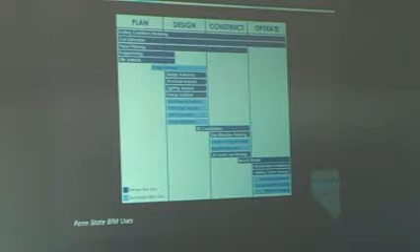This particular slide came from Penn State University, and this talks about all the different BIM uses that would occur during the project. So one of the things, as you start to talk about BIM, you look at is the building life cycle. You look at the expense related to operating that building, not just the planning, design, and construction phase. So you can see here about 15 different uses, what they call primary uses for building information modeling. Those of you that have started into BIM are familiar with a couple of these at least. 3D coordination, for example, is one of the low-hanging fruit that I think many people have been exposed to so far. It was driven by general contractors, mechanical contractors. Depends on what kind of project, but let's say hospitals was a great place to start.

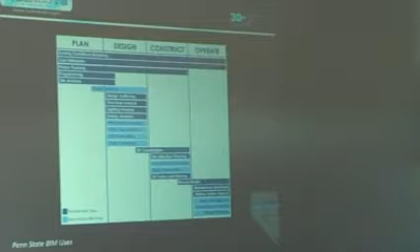3D coordination is how can I put every bit of three-dimensional information together in a model, have that holistic model, and then start to look for clashes. And if I can find those clashes virtually, then what kind of payback can I get for the owner, for the design and construction team? We can look at reducing RFIs, we can look at reducing change orders, and other constructability issues. Other things here that you'll see are different types of analysis that can be performed by different design professionals.

My pleasure to get in front of such a large group at a facility like this to talk about something that I'm very passionate about. And we'll see through a little bit of my history how this has all come to be.

But first, a quote from a rather renowned individual: never interrupt your enemy when he's making a mistake. And not too long after I saw this quote, I saw the following quote: that way it will become a bigger change order. Right?

I took off the name of the individual, but you can imagine that there are some market segments for sure that do benefit from mistakes that people make on their plans. Not the least of which perhaps are lawyers, right? But there's lots of other people that ultimately benefit from this. So let's keep that in mind as a foundation for what we're about to discuss.

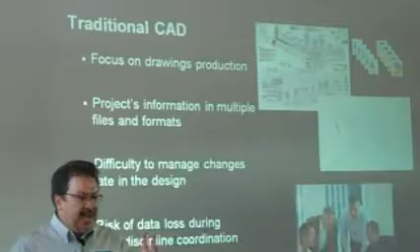Okay, so touching briefly then on traditional CAD. The history of CAD, whether it was spelled C-A-D or C-A-D-D, often referred to as computer-aided drafting, computer-aided design, or the double D, computer-aided design and drafting, was really not so much that, but the concept of computer-aided documentation. It was the attempt to recreate on the computer what we did via hand drafting.

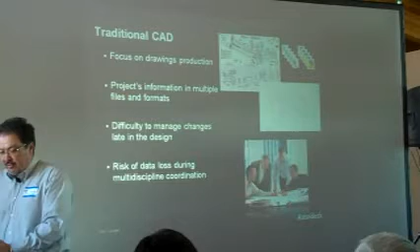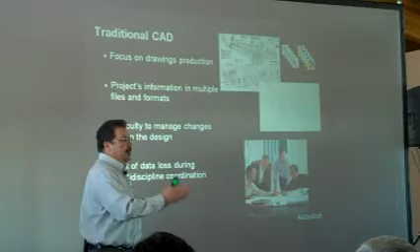And often the way that came to pass is that the project's information was stored in a series of files. So I had a file for sheet 1, a file for sheet 2, and a file for sheet 3. And the problem with that was when we had to make changes, particularly later in the design cycle, then what was required? It was necessary for every person that touched those files to make sure that they properly updated the files per the new design. 100% efficiency and accuracy was required.

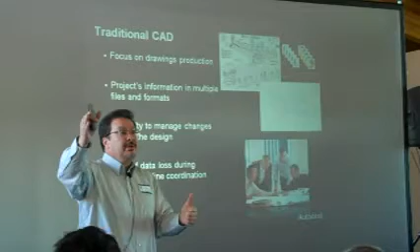Now, being human, of course, that never happens, right? So it's not uncommon that there are some sort of errors and omissions that creep into our document set. And, of course, due to Murphy's Law, which of the drawings is that object in the field going to be built from? The one that has the error on it. It's always the case.

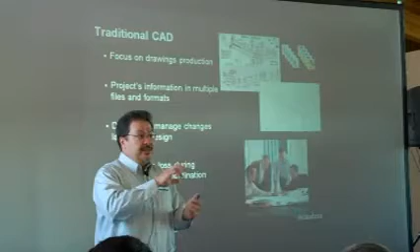And then as my data as a civil engineer had been passed on to other disciplines, they could not immediately consume my data, so what did they have to do? They had to recreate my information in their systems, which again introduced the potential for error in simply inputting my numbers into their system, right? That's always a possibility. So there are some efficiency inhibitors in the traditional CAD environment.

As an example, being a civil engineer, I'll use one of the workflows that I traditionally had: if I had an existing ground surface, one of the things I had to do was to design a road. So I would create and define the alignment. Once I had the alignment, I would sample against the surface and that alignment, so I would sample a ground profile, basically. Then I could create a profile view.

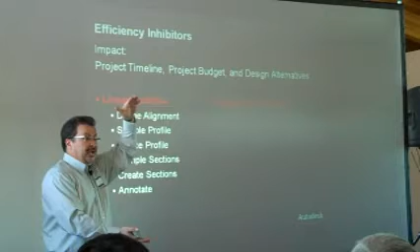At that point, I may wish to sample perpendicular to the alignment and sample sections. And then I could drop in my section views. And then at some point, well down the road, I can create my annotation. Well, that was a finite period of time that it took to complete from step A to step Z.

If I had a design change from whatever source, in the traditional CAD applications, I can't go back and easily edit an alignment in some of the traditional civil engineering tools. So the process was, you would delete it, erase it effectively, and then create a new one. And then what would happen? You would have to step through the process from A to Z over again.

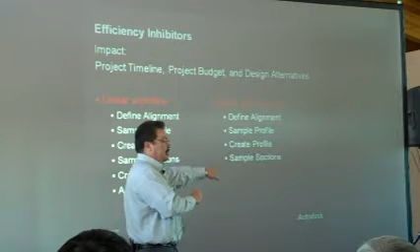And then create your annotation. And every time you had a design iteration, you had to go through all of these steps again. So ultimately, every design iteration, there was a finite period of time, or budget, or a timeline or budget, whatever you wish to call it, there was a finite period for every potential iteration.

So it doesn't take much math to figure out, well, if it takes this much budget or this much time, over the entire course of my project, I only have so many potential design iterations that I can go through before I wear out my budget, right? But that's not going to complete the job for me. So I can only do so many and still accomplish the other tasks that are required to complete my project. Well, that's a challenge ultimately to being, one, sustainable. I can't go through all the potential design iterations I may wish to be sustainable and get this design appropriate.

Now, additional challenges to business. Litigation, I mentioned litigation a bit ago, and as it turns out, and Joe alluded to this a bit ago, communication: a full 25% of all litigation in the civil engineering community was caused by poor communication. So I might have done something, I didn't convey that properly to someone else that it's critical in the design phase for this project. But then errors and omissions, almost another quarter as well. So between those two items, almost 50% of all litigation is caused by just those two simple items.

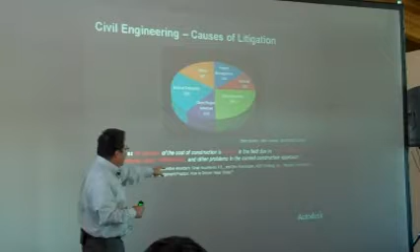Now there's a couple of other stats I'd like to point out. Again, I apologize for the small print. For those of you in the back, I'll go ahead and read this. It says as much as 30% of the cost of construction is wasted in the field due to coordination errors, waste of material, labor inefficiencies, and other problems. So here I have the quote. This was from a couple of gentlemen presenting to the CMAA, Construction Management Association of America.

And then separately, the Economist magazine a couple of years ago pointed out that inefficiencies, mistakes, and delays account for $200 billion of the $650 billion spent on construction in America every year. If we do the math, that's 30%. So that more or less jives with the typical, what percentage of a contract goes into contingency fees? Right? 25–30% is not an uncommon number. Right? People are trained to expect inefficiencies, errors, and problems. And that's a reality in every contract that exists.

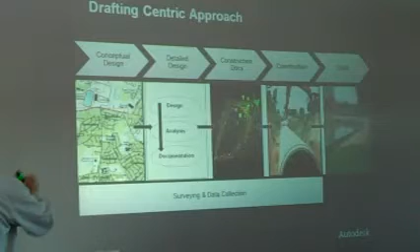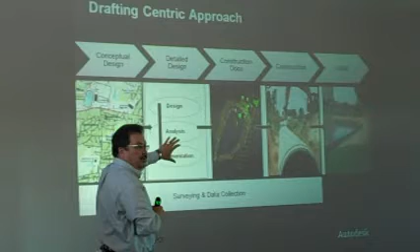So as people address this, we talk about this concept of a drafting-centric approach, which is often a very linear process. We understand the linearness of conceptual design, going to detailed design, going to construction documents, etc. But even within them, if I just focus on the detailed design, I have to do that design. Then I have to do the analysis. And then when I'm comfortable with that, I would more than likely then approach creating my documentation. And not until that stage, because again, a lot of that work could potentially be wasted.

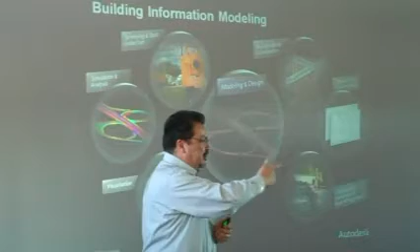So BIM, Building Information Modeling, is one of the ways that people are using to address all of the challenges in business that they're experiencing. Now, it says building, so how does that apply to civil engineering per se? And a lot of people have chosen other terms, as Joe mentioned, the concept of model-based design. And whatever resonates most with any individual community or company, that's good. But how BIM has been associated with civil engineering, it's not building as in a physical structure, but building as in the verb, the act of building. Right? So anything that will be built and that we can create models that contain information is BIM.

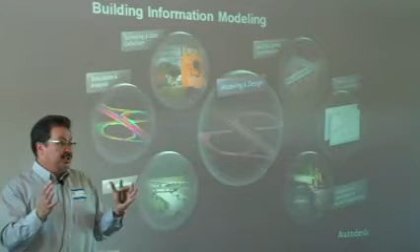So from the civil engineering perspective, right away, even from the surveying and data collection, LiDAR data capture has become such an important aspect going forward. Many people are saying, okay, here's this point cloud. In essence, that's already a model. I can see it, it has physical attributes. I can pull information, distances and dimensions and so forth from that. And take that model, like the cloud, and put it right into my design software. And from that design software, I can begin to do analysis. Right? You can't do that with lines, arcs, circles and text.

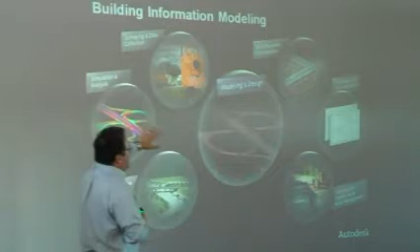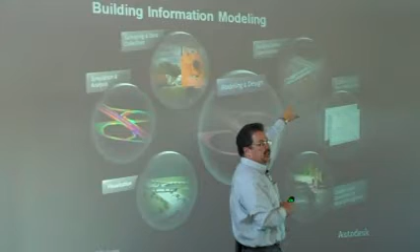And then from that design model, of course I can create my documentation, which is so very important, but I can also create the visualizations. And then I can share that model with other disciplines so that they can use my model in their models to make sure that our models mesh and work together. And then lastly, we can take that model and hand it off to the owners for various reasons, not the least of which is construction. And one of the most commonly used examples of model-based construction in the civil engineering realm is automated machine grading, right?

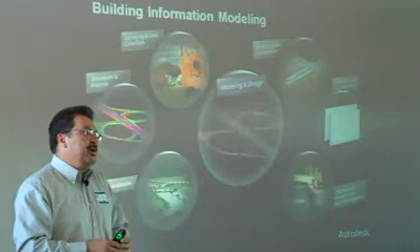GPS-guided machine grading. And I have a little example a little bit later that talks about the benefits of that. So, there was a document referred to as the SmartMarket Report by McGraw-Hill that talked about many of the benefits for the various people that use BIM.

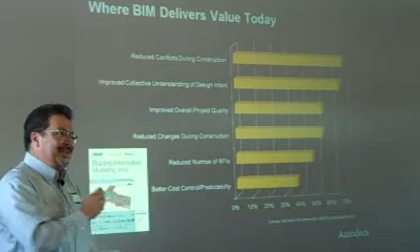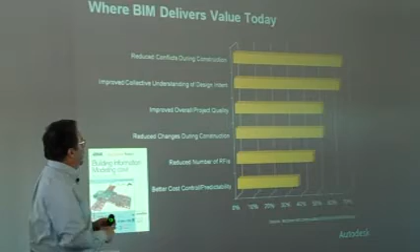And as I reviewed those, one of the difficulties that I saw for the civil engineers was a lot of these benefits were for well after I, as a civil engineer, was involved. So, reducing conflicts during construction, yeah, that benefits them, maybe not me so much. Right? And improved collective understanding of the design intent. That might be, again, further down the road. Improved overall project quality, reduce changes during construction, right? Reduce the number of RFIs, better cost control and predictability. Many of the benefits that are being touted are not so immediate to the civil engineer.

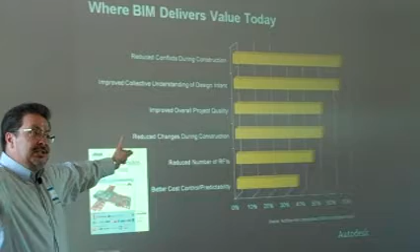But what the civil engineer has ignored, and often people say, well, we're not mandated to use BIM yet, so we're choosing not to go there. But what they're forgetting is that all those people, to gain all these benefits, they need models. And they're going to work with civil engineering companies that are providing models. Right? And if you're not doing that for them, someone else is. It's a simple reality of providing them the most value. Right? So we'll see another instance of that in just a moment.

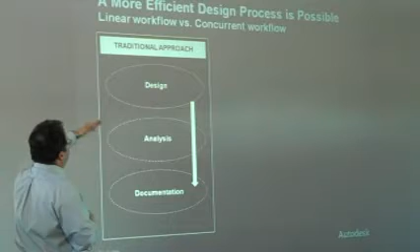Okay, so back to the linear process. Traditional: we design, we analyze, we document. Well, now, in a model-based approach, or BIM approach, things happen simultaneously. And people begin to wonder, well, how is that possible? How can all of these three things be happening simultaneously? Well, I have a couple of examples. One, basically, the newest design tools use what's referred to as the dynamic object model.

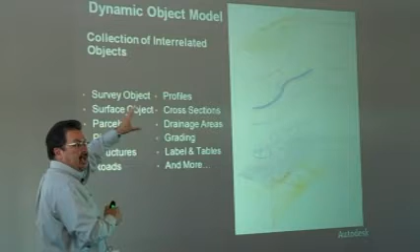And within these tools, there are physical objects that represent intelligence. So we have a physical object referred to as an alignment. That would be this here. Physical objects that are parcels or surfaces. The survey object, the road, the pipe network, etc. These are physical things that understand what they are and how they're supposed to behave. So, as a brief example then here, I have a small video that talks about object modeling and how this all comes to be.

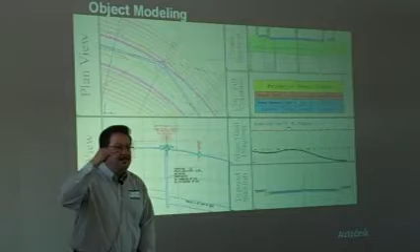Okay, so for those of you that are in front, you're going to be able to most tell this, and you can convey for those in the back what's happening. So from a simple design change of moving the profile, notice the structure is here. Right? But when that profile is moved, that structure is intelligent and says, my rim must be at that surface. So it grows automatically, and it grew over there in the top section as well. Now here, as that's brought back down, if we're looking over there in the top right, that road will drop down. What's going to happen to the structure? It doesn't stick out at the top of the road, it drops back down as well. It understands its relationship to the surface.

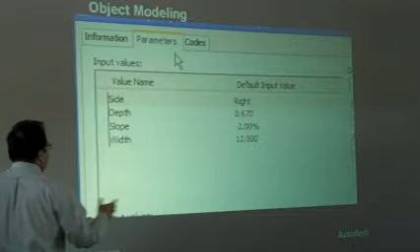If a typical section of the road is modified, and here we're going to widen a 12-foot wide road to 18 feet, if we're looking at some of the different components, what we'll see will happen, as previously happened in that other example as well, in this case, the road is going to widen there. Right? We didn't see it, but the quantities would have updated. The mass haul diagram would have updated, all as a part of the same process.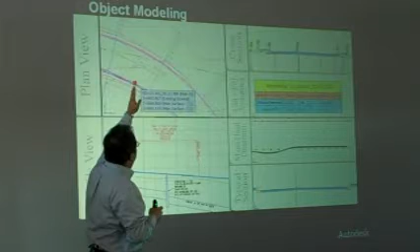As we take that manhole structure and move it from one section to the other, we're looking at the section over there, what's going to happen? It updates to the other side of the road. As we move that manhole structure off of that 2200 station there, what's left at 2200? Just the pipe and not the structure itself.

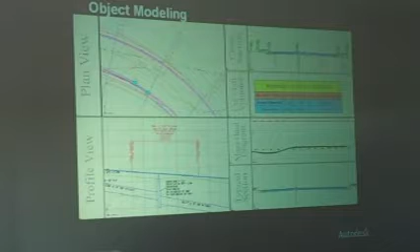Right? So the fact that as I'm working, as I'm designing, everything else is dynamically updating in the background. It lowers potential errors and omissions. It gives me significantly more design iterations than I would have had in traditional methods, where I would have had to repeat all of the steps just to get to the same point where I already was. That's the significance. And that's what allows that simultaneous design, documentation, and I forgot my third one. Analysis. Thank you very much.

Okay, so to continue. There's plenty of organizations now, and some of the earlier slides had some of these names on here. I wanted to point out a couple because they have impact as to what I'm doing. Certainly the General Services Administration, the biggest real estate owner in the world. They own all of the U.S. embassies. They're responsible for the Pentagon, all of these national facilities. The U.S. Army Corps of Engineers, in control of all the dams.

The states of Wisconsin and Texas have mandated that all work being done on state facilities be done via BIM. Ohio has declared that they're having a BIM mandate forthcoming. And then within the last month, Australia has said that they fully support the concept of BIM. They haven't mandated yet, but they say this is the way forward and it's what's going to help our economy get out of the doldrums that we are currently experiencing.

And then even after that, but perhaps more aggressively, the United Kingdom put out a report that said they are fully 100% behind BIM. They're going to approach it via a staged adoption process with fully mandated BIM by the year 2016 for anything related to government jobs in the UK.

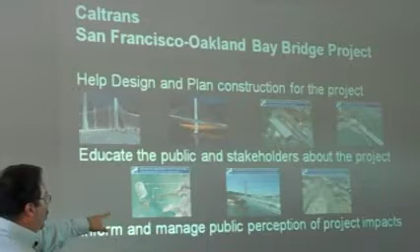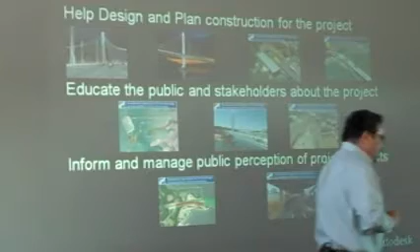And then schedule it. They also used it to educate the public and stakeholders regarding the project. There was plenty of pieces. You can't watch the news in San Francisco without seeing some references to either the Oakland Bay Bridge project or what's referred to as the Doyle Drive or Presidio Parkway projects. And because they have models, they repurpose the models for many different reasons. And they've been able to inform and manage public perception regarding the project impacts. One of them in particular had to do with a detour that's happening for the project.

And they've been able to use those models so well, I should have had this up a moment ago, that they've even created an app. Can you see that? It says the Bay Bridge Explorer. So this app allows people to drive their detour right now. You can download it for free. And it was possible because of the model, right? It was repurposed. But what else is this?

Right down in the corner, it has an engineering company that provided that model. That's PR. This is an Apple app, and people are dying to get Apple apps available. And here is free PR for that organization because they've been able to produce that model for Caltrans.

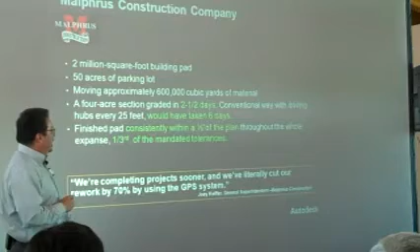So with that, just a couple more points. I mentioned the automated machine grading. Just a couple of facts. This particular organization was able to do a 4-acre section of a larger project in 2.5 days, which would have taken 6 days to complete. They were consistently accurate with automated machine grading to 1/2 inch of plan, and that was 1/3 of the 1.5 inches that was required per their contract.

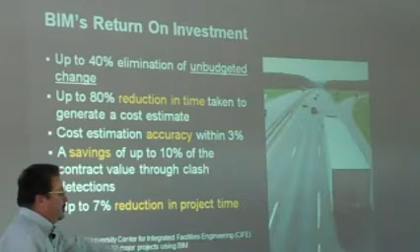So, then BIM's return on investment, the bottom line. This was from a report done by the Stanford University Center for Integrated Facilities Engineering, based on 32 BIM projects: 40% elimination of unbudgeted change, 80% reduction in time taken to generate cost estimates, accuracy of cost estimation within 3%, and it goes on and on. Ultimately, the bottom line, a reduction of 7% in project time for most people that were involved in these projects.

And in conclusion then, how do people win with BIM? What do they gain ultimately out of this? It boosts productivity, more design iterations, correct?

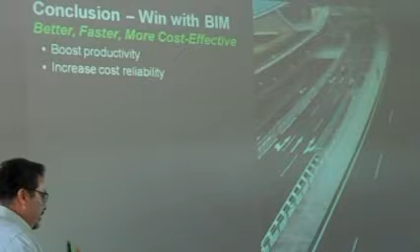It increases cost reliability, less clashes found in the field, that the model has all the components, and that allows us to cost those up quicker. Build more sustainably with more design iterations, visually explore constructability. I can sequence that model, better predict and communicate project outcomes, downstream value to that data, and it ultimately does build closer business relationships amongst that community that has already been capable. Who are they working with? Only each other, because everyone else is not quite there yet.

So for a business, ultimately it's less errors and omissions. As a matter of fact, the first time I had this on the slide, one of these words was misspelled, because it happens. Errors happen, right? And this has the tendency to reduce those, and less financial risk, and ultimately less financial exposure. So changing the way we do business is essential to remaining competitive at the current stage that we're all working in. And that concludes my section.

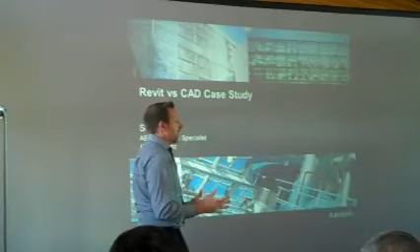First, a little bit about me, Scott Davis. I'm an architect out of Southern California. Angel and I have been with Autodesk about the same amount of time, just over 4 years now. I'm known in the community as the Revit guy, because I learned about Revit the day it became available to the public way back when. It's actually been 11 years now, prior to Autodesk even owning Revit. I introduced it to my firm in Southern California. I worked for a firm called WLC Architects for about 8 years, and then left to join Autodesk because, like Angel, I'm very passionate about this particular technology.

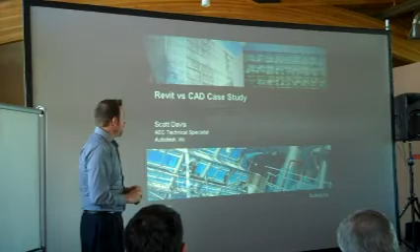With this particular audience, what we want to talk to you guys about all day long is the business value of BIM. So I was looking for examples of this, and I found one online. It's pretty recent, and it's a case study. So let me jump over here.

I didn't get a chance to get Angel's little clicker plugged in. There's one right there. Which one? To the right. This one? Yeah. Does it have a key? Alright, there we go.

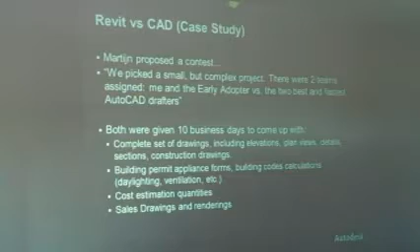This actually came from a website called the Revit Forum. Oops, I can't get to it right now. And I have a link at the end of it. But Martijn is actually out of the Netherlands and has his firm and was really perplexed with how to get his firm to move over to BIM. They were a CAD-based workflow. They were using AutoCAD, and he was having struggles trying to convince the upper management why BIM and Revit in this case made sense. So this is from his website, from this blog post that he wrote.

They proposed a contest internally. They picked a small but complex project. There were 2 teams assigned. It was Martijn and his early adopter in their firm, who was a Revit user, and their 2 best AutoCAD users. Their fastest, best AutoCAD users. They were both given 10 business days to come up with a complete set of drawings, elevations, plan views, details, sections, construction documentation, building permit compliance forms, building code calculations, daylighting, ventilation, etc., cost estimates and quantities, sales drawings, and renderings as well.

Along the way, they wanted to propose some design changes, but they didn't really want to tell the team too much about this, so they said after 8 days, structural calculations would be supplied, darn structural engineers, that would force some design changes to take place. After 3 days and 9 days, there would be a mandatory, but so far undisclosed, set of changes by the principal architect. So they're introducing some change in this. And Angel also mentioned the real power of BIM is not only the documentation in the first place, but the change management that happens. After 10 days, each team would grade each other's team's drawings.

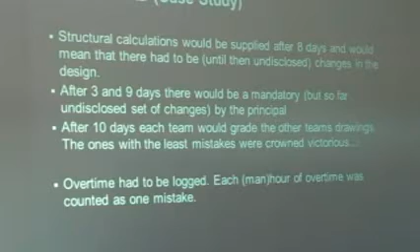The ones with the least mistakes were crowned victorious. Overtime had to be logged. Each man-hour of overtime was counted as 1 mistake. So they basically counted mistakes, and they counted the hours of overtime on the project, and those were points. The Revit team won by 64 points to 3. The 3 points came from the fact that they had 3 hours of overtime, which was for a very long Revit rendering. So somebody had to stay in the office and tend to the rendering. And probably the most compelling part of this is that the other team didn't even finish the second set of changes in CAD by the principal, nor the renderings, and I find this pretty funny, because they didn't have time to build the SketchUp model. Right?

So they were building everything in CAD in 2D, and they were trying to run a parallel process, which was to build a SketchUp model to actually have the visualization and do the 3D at the same time. So that particular team is now fully converted over to BIM, basically convinced the principals in this particular firm of the business value of BIM. It was just huge, compelling reasons why they made that switch.

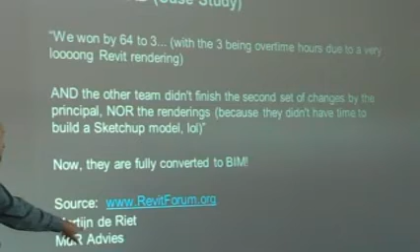Here's a source. It's actually on the RevitForum.org if you want to go out and look for it. If you look for Martijn de Riet with MdR Advies in the Netherlands, you can find that post on there and read up a little bit more about it.

So what I want to do next is actually jump into Revit, show you a little bit live, for those that aren't familiar with it, and how it works, and just some of the simple things that it does for enabling us to manage the change within our drawings themselves. Switch over, oops, my resolution changed dramatically. Zoom to fit.

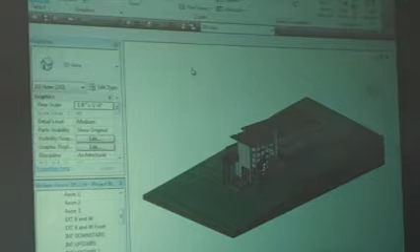So first of all, in a Revit-based model, obviously we're doing things mostly in 3D. As we start to construct a particular project, everything we're placing, rather than a CAD-based workflow, drawing lines, arcs, and circles to represent objects, we're actually placing the real objects, or representations of those objects. So I place walls, I place doors, I place windows, and those objects all have intelligence.

So the lowest hanging fruit of a BIM-based workflow is, of course, visualization, being able to show our clients models like these, and not only showing them from a 3D exterior view, but even getting inside of it. So we can get inside of a model, we can zoom this one to fit, and we can use tools, much like video games, to stand in a particular space and look around or even walk around, and much like the video games, minus the machine gun, we get to visualize the interiors and exteriors of our models.

Much different than the old school way of going into a client's office with a set of plans that might look something like that and trying to explain to them what the project is going to look like. So we're doing everything in 3D. Now, a couple things that I want to point out to you as far as change management in a way that Revit differs from a CAD-based workflow. And Angel hit upon this.

In a CAD-based workflow, everything's done in separate drawing files. So like you mentioned, you have a drawing set for sheet 1, another drawing set for sheet 2, you've got DWGs for plans, other DWGs for sections, elevations, etc. And you have to X-reference all of that stuff together. And if you make a change anywhere in the set of documentation, it's our responsibility as humans to go back through and pick up all of those changes, right? Tremendous amount of time consumption there.

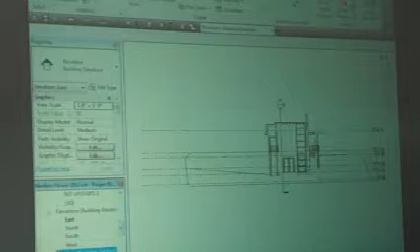Revit is a database-driven software system. Everything's included inside of one single file. So as we're looking at this 3D model, our plans, our sections, our 3D views, our elevations themselves, any renderings that we have, and even our sheets are all included inside of one single file. So anywhere I make a change, it ripples through the entire data set for me and updates all of that file.

So for instance, if I go into one of our overall floor plans here and I start looking at this particular building section, I'm actually going to hit delete on the keyboard and get rid of that building section. If you look at my project browser over here on the left, I have no more building sections left in my project. Now in a CAD-based workflow, if I was a user and went into the directory and deleted all my sections out, somebody would probably kill me, right? Because it's going to take hours to recreate that kind of stuff.

In Revit, since we have a live model, it's literally picking the section tool, picking 2 points through the model, and Revit creates the view for us. It's a live section looking directly through the model. Huge time saver, right?

It always happened to me when I was in practice that these kind of things came up on a Friday afternoon. The principal would come up to me and say, hey, we've got a meeting Monday morning, and I need you to draft a section through that model for me. Oh man, it's going to be a long weekend.

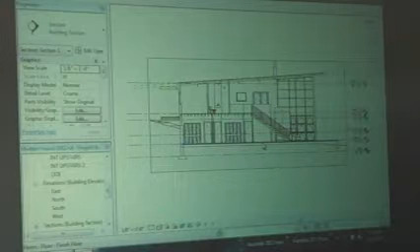In Revit, I could do this all day long, and it was not just for documentation purposes, but for just exploring our project. If I needed more sections through here, and I wanted to start investigating the different height relationships throughout the model, I could just draw one, grab it, use the copy tool, space out a few, and maybe just do 5-foot intervals. Oops, trying to go too quickly here. Copy that guy. I'm going to do it multiple times.

I just drew 12 sections to the project. All of them are live representations of the project. Now, something else that used to get me all the time as a project manager at WLC was just making sure that these particular callouts, whether they're sections, elevations, details, etc., actually pointed to the right location on the sheet. So, for instance, you notice all my section callouts right now have dashes in them.

In an AutoCAD-based workflow, we used to put X's in these things. Anybody in your firm, you guys see X's in your detail callouts from time to time, right? And how many of you have gone through a plan check and had a plan checker find one of those callouts that has the X's in it, and says, where does this detail go to? Does it point to the right thing on the sheet?

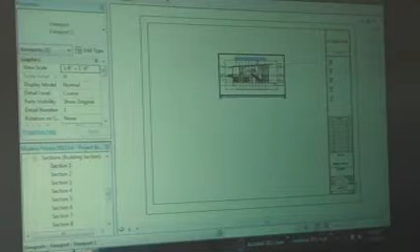In a Revit-based workflow, all of that is worked out for us, and this is just the way that Revit works. I have my sheet set up for my sections here. I can grab section 1, drag and drop it, place it on the sheet. You know what? That scale is not very good. Let me activate our view, and we'll change that scale to a quarter. It updates all of my line work, all of my annotations, all of my callouts, everything is scaled properly for the scale of the view on the sheet.

No layers in Revit, no do we place everything on A-Anno-Dims for dimensions, are my line weights correct, are the tick marks and my dimensions consistent from sheet to sheet, all of that is taken care of for us inside of Revit. And most importantly, since I've now dropped that on a sheet, the section marker just filled itself out for me. That thing alone originally sold me on Revit, right? Because now as a project manager, I did not have to go and chase these detail callouts down. I used to spend countless hours every single day red marking drawings to make sure the details are pointed to the right location on the sheet.

Now, as Angel said, changes happen. One simple change that happens in architectural practice all the time is that sheets get renumbered or reshuffled, or we have to add something. So if I go into this particular sheet, come down here, and we're going to make this maybe sheet A404, guess what? Just updated my detail callout as well. So that change then ripples throughout the entire drawing process.

Now, one other example of something that Revit helps with for all of our documentation and change management is schedules. How many people in your firms like doing scheduling? Door schedules, window schedules, room schedules. You've seen them working. You guys have all done them before, right? You have your set of documentation on your desk, usually a ruler and a highlighter, so you can highlight off these individual rows of the corrections that you've made. And then you see people squinting at their screens all day long so they can zoom in tight enough to see those things.

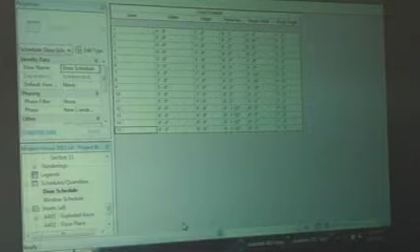Now, in a CAD-based workflow, if I did the door schedule, what would I have to do next? Go back to every single floor plan, section, elevation, anywhere that I have those door tags, and make sure that the door tags were correct, right? In a Revit-based workflow, I just took care of that. It's all live data. I go back to my floor plans. All my door numbers are now updated for me as well. Let's hide some of these sections just for the time being. You notice that all of my door numbers are now coordinated with my door schedule.

Vice versa. If I want to come in here and change door 13 to something different, go to my list, and we're going to make this one 23 for some reason. Apply that. I go back to my door schedule.

Door 23 is right there. Right? So then I can set this up to resort for me and set that up accordingly. So that again is a huge time saver. The people in your office don't have to do door and window schedules anymore.

It's an automatic thing. They can concentrate on the design of the building, concentrate on making it work, making it flow, looking at those 3D images, looking at sections, looking at elevations, making sure that things fit. They don't have to concentrate on the CAD. They don't have to concentrate on creating your window schedules.

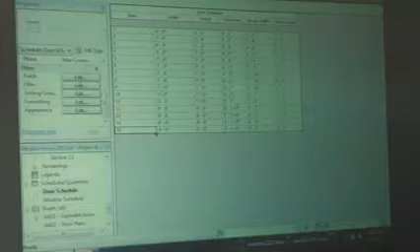Let's look at a window schedule here real quickly. Different view. I've actually categorized this to show me the individual window types. Right now they're done by 1, 2, and 3. Let's bring up a floor plan at the same time here. And we'll tile some windows side by side. Close out of that one.

Alright, so if I zoom in a little tighter here, here's my windows, type 3, and that's actually wrong, right? So we should start labeling our windows by type A, type B, we'll make this one type C since it's 3. And you might have just seen what happened there. As soon as I do those, it's actually resorting my window schedule for me because it knows to sort them in alphabetical order. And my tags for my window in that particular view just updated.

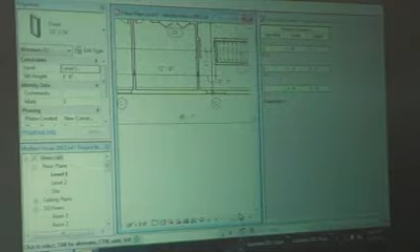So again, something I don't have to go out of my way and manually coordinate. Revit takes care of those things for me. Again, it allows us to concentrate on the design aspects of the project. Now, there's so many other benefits of having a model. Angel showed you a few of those, from making iPad apps to using the model for facilities down the road.

In Revit, it's about being able to start analyzing these models. So we, in Revit 2012, have an analysis tab that allows us to start looking at energy settings of buildings. So we can start putting in some ideas about what this energy model consists of. And then next to that button at the top, we've got the ability to analyze these models, which pushes them out to the cloud, allows us to do energy...

Well, now we as architects can use analysis tools like these directly inside of Revit, and from the moment I start, I can put an enclosed space on a set of drawings, 4 walls and a roof. I can run an energy analysis on it. So I can start making those design decisions when they make the most impact, which is at the very beginning of the process. So hopefully that gives you guys a great sense about how Revit can be helpful.

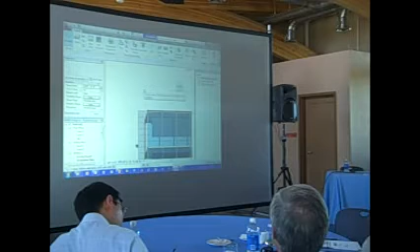Am I on? Loud, good? Okay. I'm pretty loud anyway, so I don't need a mic. But it's good that we have one. Well, let's see. Good morning, everybody. Everybody enjoying the show? Yeah? Now we're going to get to really cool, exciting stuff. Mechanical, electrical. Wow. All right.

So, a little bit about me. My name is William Spier. I'm an MEP technical specialist with Autodesk. I've been in the industry 17 years now. Cut my teeth at an MEP consulting engineering firm in Seattle, Washington. Did a lot of work on Nordstrom stores by and large. But everything came across my desk. Schools, churches, hospitals, you name it, we did it all.

Became a project manager for a lot of Nordstrom stores; that was the bulk of my work. Left there, went to work for Johnson Controls in Pennsylvania, doing O&M work for Merck Pharmaceuticals. So I went from the design side to the operation and maintenance side. And when I finished school, I left there and went to work for Midwest Mechanical Contractors in Kansas City. So I went to the contracting side. And we did by and large hospitals and ethanol plants there. I did the coordination work on those.

So I got to go from design, operation, and maintenance to the contracting side, where I got a set of drawings a couple weeks after I was there, and then looked at them and said, that's nice. We rolled them up, threw them in the corner and said, all right, let's start over. How many contractors do you need? Yeah, so, okay, you know what I'm talking about. Said, what are you doing? I said, go ahead and try and build it from that, right? They weren't using BIM at the time. So, that's a little bit about my background and my experience.

What you're looking at right on the screen now is Revit MEP, and just a little breakdown for those of you. In fact, before I go further, how many people in the room have worked on a BIM project with Revit? Okay, the rest of you not. All right, how many engineers do we have in the room? Okay, anybody in the room that's interested in energy analysis, energy design, whether you're an architect, energy analyst, mechanical engineer, hands up? Okay. All right, the rest of you take a break. All right, so

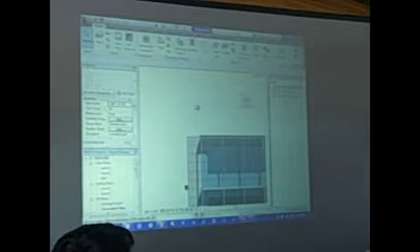Three flavors of Revit. Revit Architecture, which you just saw a minute ago from Scott. Revit MEP, which is what I'm going to show you, and Revit Structure. And the way they work together in a nutshell is simple. The architect, typically, and the structural engineers will get together and they'll both create a model. And they're going to create the models based on each other's work. So they're going to link them together, not unlike X-referencing in AutoCAD. So each can see what the other's doing live. They can stay out of each other's hair.

A structural engineer puts a beam in, he can locate that against the wall, and if Scott moves the wall, the beam will move with it if Scott allows it. So as they go back and forth, they get updates saying, this is moved, do you want to accept the change, reject, and so forth and so on. The thing that's nice about Revit is that it allows them to do that much earlier, much faster. They can build models quickly. Anybody that's done Revit in this room will attest to that. So if you think I'm kidding, ask anyone in the room that's done Revit, you'll understand how fast this goes.

What that does for me as a mechanical designer is it allows me to bring my skill sets to the table much, much earlier in the project. Because before, as Scott said, we get designs way late in the process from the architect, and frankly, we'd rather have them way late in the process because we're going to work out all this analysis, and then Scott's going to go make a change, and what happens to my design? Let's start over again, right? Well, now, as Scott makes changes, I can just roll with the punches, and I'm going to show how some of that works real quick here in a few minutes.

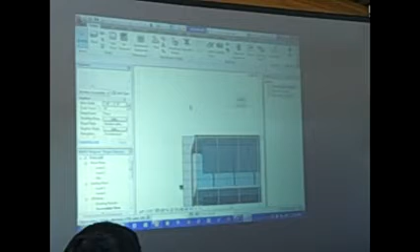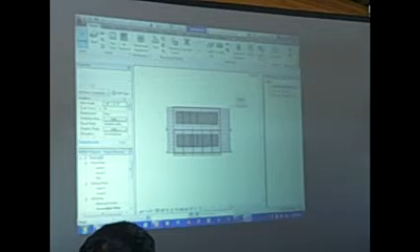And there's three flavors of Revit, so today we're going to look at Revit MEP. What I was going to do is take you from the more mundane to the intergalactic, so to speak. But Scott really covered the mundane part of it, which is good. Not the boring part. What's the mundane stuff we do? Going back and checking to make sure that section view number was right. I was actually going to show you that, but Scott showed you that, right?

And when does that count? When we've got 30 minutes to get the project plotted. And what do we normally do in AutoCAD? We open that file, make sure it looks right, then close it. Not in Revit. As soon as you make the change, I don't need to go to these other sections and views and make sure they're right. I already know what's changed there. I don't have to open and refresh, right? So he's covered the mundane, which is good. So I'm going to head towards intergalactic right off the bat. Let me switch views here.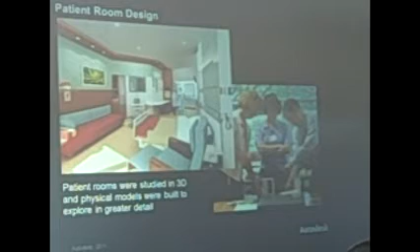People always ask me what product we use, so let's just get that out of the way. It wasn't just an Autodesk BIM project. There was Microsoft involved, there was Autodesk, there was SketchUp, there was Graphisoft, there was a little bit of everything used on this project. A lot of Microsoft. So let's clear the air on that right now.

So they modeled everything, down to the patient rooms, down to the MEP racks, and that's really what we're going to focus on for this particular case study. So let's start with the patient rooms, a couple of things. So they actually modeled the patient rooms, one for buy-in.

Who's built a hospital in the room, or designed a hospital? All right, I'm really short and can't see, so be proud.

Put your hands up. So if you've ever built a hospital, you know that you got to talk to the doctor, you got to talk to the nurses, you got to really get buy-in, especially for the head wall units. Where are the placements of all the things? But you're going to go through actual mock-up, and they really leveraged BIM for the actual patient rooms. And they built all the physical mock-ups, they brought the doctors and nurses in, and they got buy-in.

That was important. And also during the existing hospital renovations and things, they took a lot of surveys and asked the patients, what are some things that are important to you? The patients said, well, I don't like dark hospital rooms. And I also don't like walking from my bed to my bathroom when I'm in pain. So they really used BIM to say, well, what are some things that we can do? We can reduce travel distance to the toilet. That would be good. We can also make our rooms brighter.

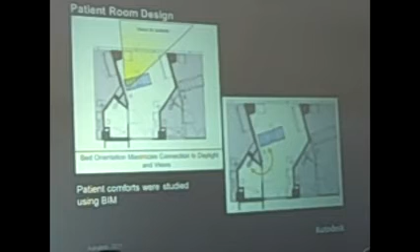So they kind of changed the shape of the hospital rooms into the kind of weird design of the hospital room. Then they started thinking about, well, what else can we do? Let's fabricate. Let's start looking at ways that we can break these hospital rooms down and fabricate the actual pieces. Put them in a warehouse and ship them out to the job site. Kind of a unique concept.

So they started breaking these hospital rooms down into individual pieces. So they broke them down into a toilet room module and actually fabricated everything inside the toilet room module. They broke it down into a head wall module, fabricated everything inside the head wall module. Now that took a tremendous amount of buy-in, a tremendous amount of modeling, a tremendous amount of mock-up to get to that point. And then the casework module on the right side, whew, sweet. So really cool concepts, a lot of models, a lot of BIM.

And then they said, okay, what are we going to do with it? Now we've got a model. Let's put it on a truck. So they were able to take 4 complete model sections, built sections, fabricated sections, place them on the truck. Let it do BIM. Conceptualizing it before it's ever built. Cool stuff. So what else did they do?

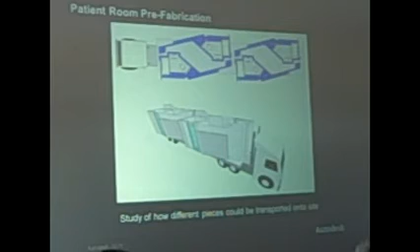And they were able to study the MEP racks. Bring all the 5 major trades together. MEP, fire protection, all those guys all together and fabricate the racks into 16-foot by 5-foot by 5-foot sections in a warehouse. So now you're moving from overhead work into warehouse work. Now you're safer, you're managing your risk better. And so think about that.

So in Ohio, they're able to fabricate these MEP racks. Better coordination, a lot safer. So let's take a look at these. So we've got our MEP racks in the top left. We got some piping getting installed on the bottom left. The actual trades working together on the upper right. And I think delivery on the bottom right.

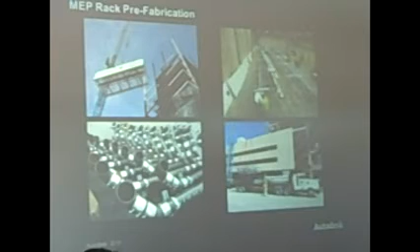What do we have now? Some statistics. So on an average job like this, with 5 different trades, throughout the course of the project, you're going to have 100, 120 different people working on a job throughout the course of time. This job was reduced down to 18 people working in a shop. Think about the labor savings of that. Super significant on a construction project.

Also, the labor rate was reduced from $50 an hour to $40 an hour. That would make me happy as an owner. Being able to save money, 20% savings. What else do we have?

So, conventional job, you're able to lay 200 feet of pipe in a day. This job, 600 feet of pipe. Why? Because I only have to go over here, grab my pipe, walk back, and install it in my rack. And I'm also not working overhead, and I'm not having to bend over as much. And everybody's working in the same area.

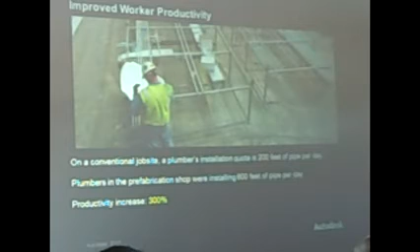This one's really important to me. When I was working in construction, safety was our number 1 priority. No injuries on this job because everybody's on the ground, not climbing up and down ladders, working in the same area. Plus, you only have 18 guys. It's pretty

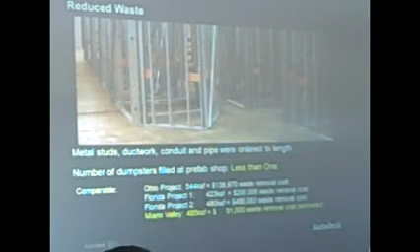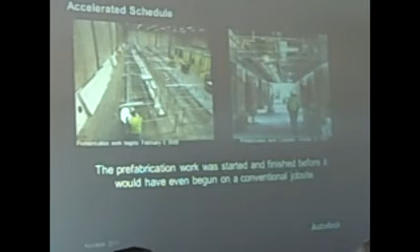So, a couple of images of the actual fabrication. Boiler rooms getting ready to be fabricated. Toilet modules getting ready for delivery. These are actually fabricated modules. Head wall units. Patient rooms getting ready for delivery. I think these are pretty important. These are the actual toilet modules getting ready for installation.

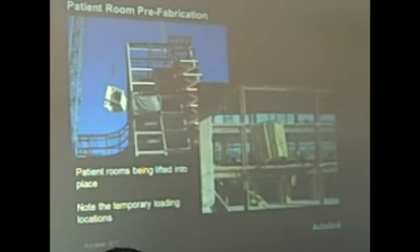And then they use these loading platforms that actually set out about 7 feet from the building, and they can just pick them up and move them around so that they can put the toilet modules in place, and they basically set them on these big giant skateboards and wheel them around, make them easier for installation.

And they coordinated this building so well, wow, my West Virginia accent really comes out, doesn't it? So well, we'll try again.

They have the depressions in the floor, and they basically treated them like Legos. Set them in place, move on to the next piece. So, some of the statistics. So let's move on to North Carolina. And actually dive into Navisworks, a couple screenshots out of Navisworks.

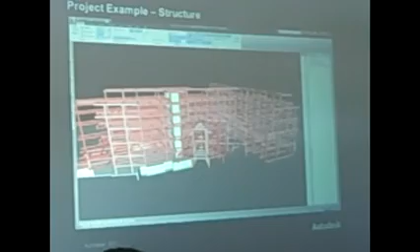So this project, the first couple slides that we're going to look through, we took it to model, but it was using traditional methods. No BIM. Drawn using AutoCAD, coordinated using regular methods. The architect drew it, over the wall to the contractor, fine, whatever. Drawings were sent out to the fabrication shop, steel erector erected the items, no problem. Slab was poured throughout the building, no problem.

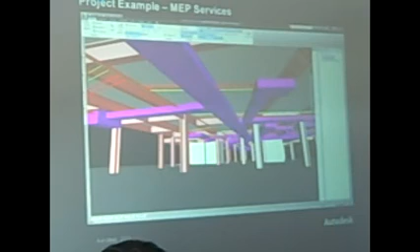MEP was added. They started on the 5th floor, going to work their way down. Once they added MEP, and they really did go this far on the job, they noticed a problem. I'm 5'5", and I could reach my hand up and touch the bottom of the MEP. Does anybody think this would be a problem on the construction site? So they didn't actually add the ceiling, but we added it for visual scariness. So less than 7 feet.

So $60 million project. They fully erected the steel. They fully poured all the slabs on all 5 floors, and they hung the ductwork on the 5th floor before they realized, we've got a problem on our $60 million job. Oops. So they fired the contractor, fired everybody else. All kinds of lawsuits started going around, delayed the job about a year.

And there was a contractor that came in and said, hold on, I think I can fix this for you. Give me $100,000 and I'm going to go model this. I've got a structural engineer that I want to work with, and I think we can solve your problem. We're not going to do anything else but examine it. They explored a lot of different options, including tearing the entire project down. They've already invested a ton of money. Well, who wants to tear down an existing structure?

I sure don't. So they actually modeled the entire remodel with a structural engineer, looked at it, and came up with a solution. And this may be one of the only jobs I've ever seen do this. Are there any structural engineers here? You? Well, this might be a scary thing for you. They cut a hole in every single piece of steel.

All of it, so that they could put the ductwork and piping and everything through all of the steel, so that they could keep their ceiling heights, at a cost of $10 million and an additional delay of 6 months. So 18 months goes by, $10 million on a $60 million project. So as a structural engineer, is that scary? Might be a little scary. So